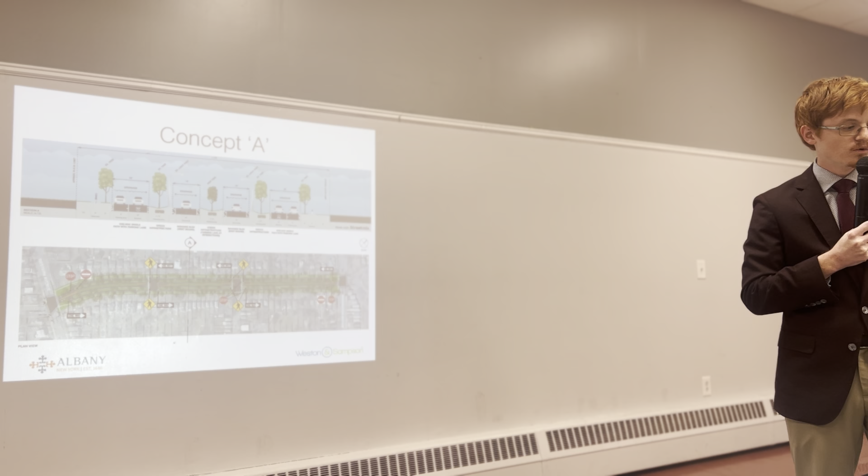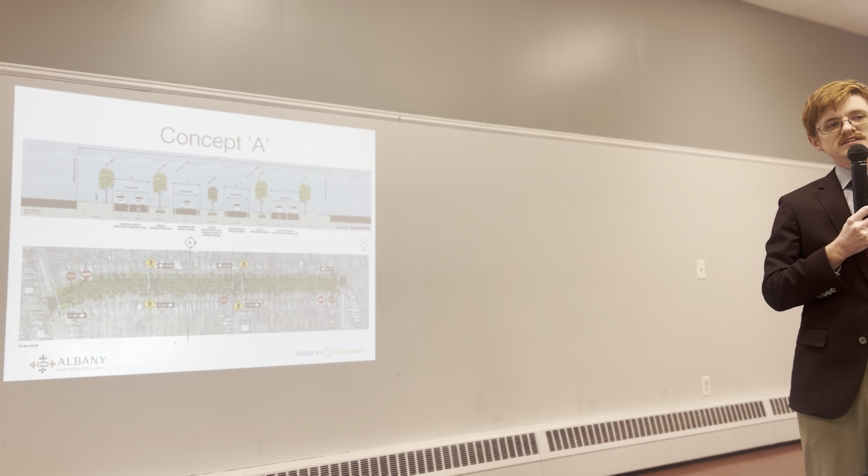Quick overview of those two concepts that were shown. This was Concept A—it had the bridle paths going single direction with a dedicated parking lane. Perhaps the biggest change to the main Manning Boulevard corridor was the introduction of a middle median dividing the two travel lanes, which would take the place of the turning lane at some sections. Reiterating from last time, some folks thought we were removing the turning lane entirely—we are providing the turning lane at all intersections and bridle path access points. It's just in sections where there isn't a true need for one that we were thinking of introducing something like a buffer.

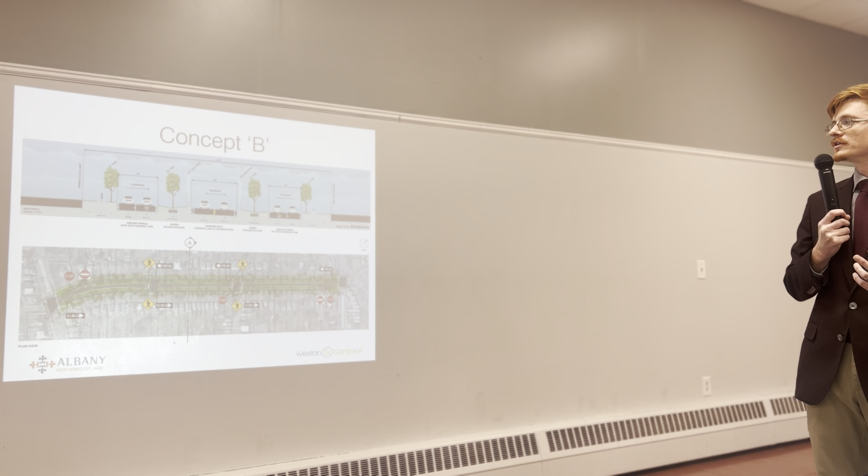Concept B, the second one, had a very similar treatment on the bridle paths. Again, rather than a median, it involved narrowing the road down to two lanes, and then expanding that to include the turning lane at the various intersections and access points along the corridor.

Quick overview of some of the comments we received—these are very high level, we tried to summarize everything into the broad themes that came out of it. There were three main topics: the bridle paths, safety, and the main Manning Boulevard area itself.

First comment: folks weren't super thrilled about seeing the bridle paths go one direction—that was maybe one of the biggest comments we received both at the meeting and in the public survey. Associated with that were concerns about how winter maintenance would work. There were also comments about curbing being desired along that corridor, as well as concerns since both concepts show removing a couple of the access points to the bridle paths.

Folks were a little concerned that might cause additional traffic convenience issues, especially coupled with going to a one-way travel lane in each direction. As far as bike and pedestrian safety, a lot of folks expressed desire for crosswalk improvements, intersection improvements, and additional traffic control things such as bump outs at the intersections, speed humps, those types of things.

And again, just kind of general support for bike lanes, bike infrastructure, and those associated improvements.

As far as Manning Boulevard itself, with the turning lanes, some folks are concerned how this might impact the queuing lanes. That's a big concern now at all the intersections, traffic backing up trying to get out of the neighborhood. There's some general questions about utilities, and questions about narrowing the lane - does that really help calm traffic or does it exacerbate the issue?

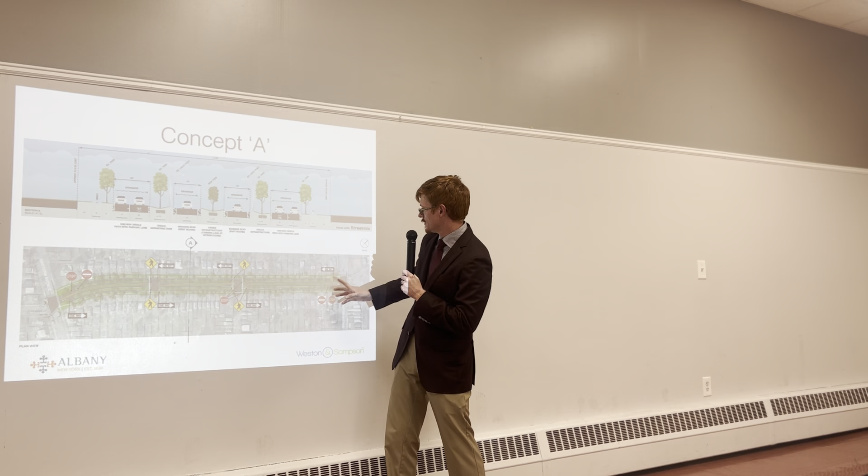Let me pull up the plan concept quick. So again, this was the initial concept, concept A here. I know it's tough to see, but the intent is that it's green space except at the intersections, the main intersections, and at the bridle path access points as well. So again, it's hard to see here, but there'd be a green median in between the lanes, it would be there except at all the bridle path access points and the intersections. It would stop there to make room for the turning lane.

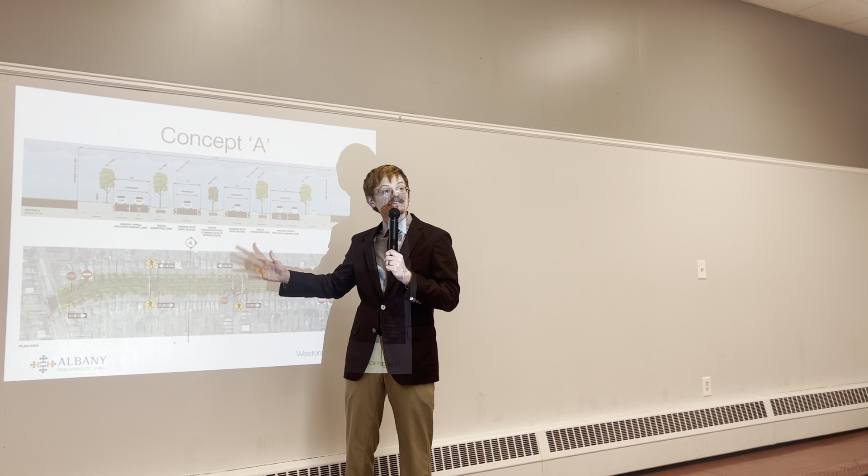Again, the intent is if we needed to add another lane and keep the green space, you're then pushing into the green space, so it's already there, the existing buffers, it's a wide right of way, but a lot of it is actually green space, and so we're trying to minimize the amount that we're impacting that.

As much as we kept the current openings, there would be less green space, kind of disjointed, and that was the thought with removing a couple of them. So if it turns out they all need to stay, there would be less of a green buffer if that's what's ultimately developed with. I like having the amount, I do agree that it's important if you have to be somewhere to not get stuck in a bottleneck, but it's nice to have the green space.

Like we've been seeing with a lot of comments, it's a balance between convenience and aesthetics versus service, or circulation, traffic circulation. So we're just trying to figure out what the right balance to strike is, where again everybody's kind of generally accepting of it.

Has a final decision been made on if there's gonna be any divots or bumps in the bridle path? Because I feel like that could make it hard for bicyclists. Yeah, that's what we're looking into.

Again, it was brought up as a suggestion. I don't recall if it was at the last meeting, maybe during one of the other conversations, or in the comments that came in on the website. We could technically do them there. We haven't looked into that option yet, so that's something we're still exploring.

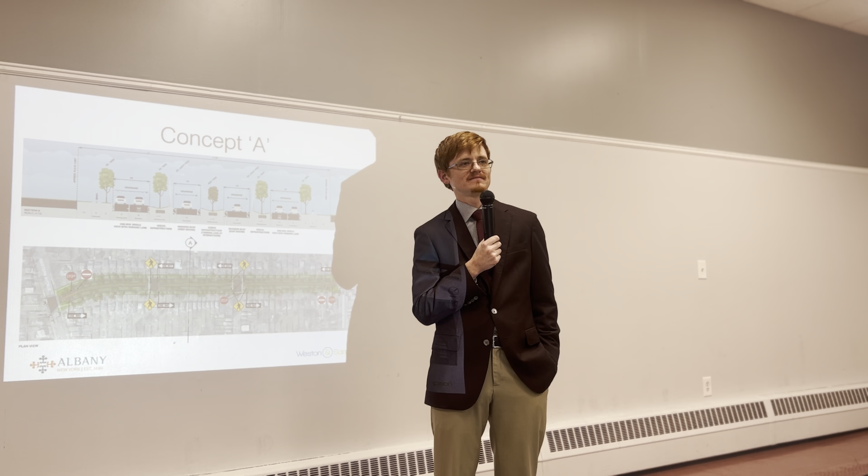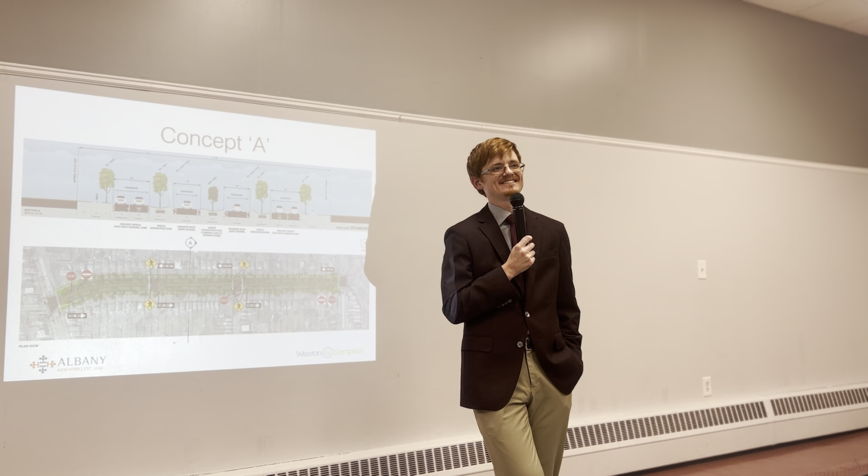And just one last thing, I'm very pro-tree, so I know trees can grow quickly, but I also have a big concern. I think after the initial concept, a lot of people were talking, and we were just picturing like Armageddon on the street, especially late fall, and it's just a muddy mess, and all our trees are gone, and it's kind of depressing. So I feel better that you're saying a handful of trees, but I would love it.

It certainly isn't a clear cut. And as Frank mentioned, the final determination, which I'll reiterate again, is independent of this project. That's kind of a broader thing. Would it happen regardless of this process happening? Yes.

I don't know that there's gonna be an arborist or a meeting with them for people who are super pro-tree. So what we have to do is, again, the report's gonna come out, the report's gonna explain what's coming out and why. The report's gonna say where we're going to put trees and what kind, because it's a matter of if you put the same tree and Emerald ash borer comes back again, we'll lose all the trees and we're all gonna die. Well, the street has a variety, right, that's what I want.

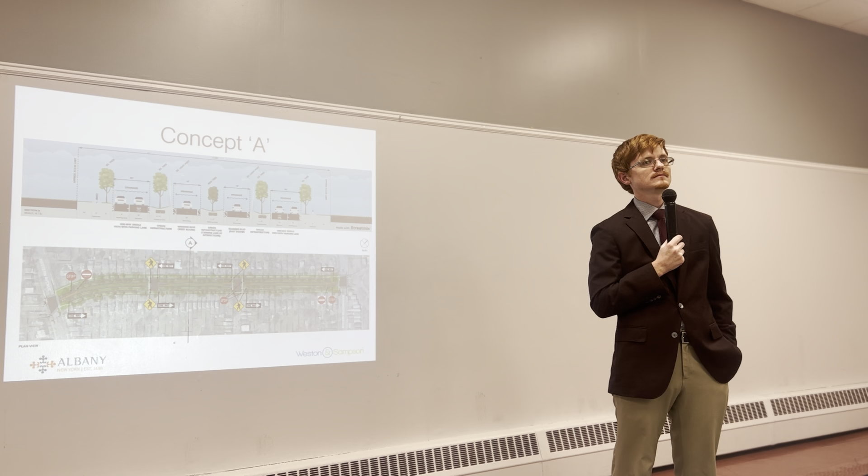That's what we're going to do, save as much as possible, and have a variety. I promise you, that is what he is doing, and that's why a lot of them are coming down.

So there will be a variety, but once that report is out there, we want to hear your feedback. You can always send an email and get back to you with an answer. If you have a question that's not answered, read the report, because 90% of your questions will be answered there. And if there's an additional 10% you don't get, then absolutely ask the question.

And I'm at 90 Manning, just for the record. Okay, alright, who's next?

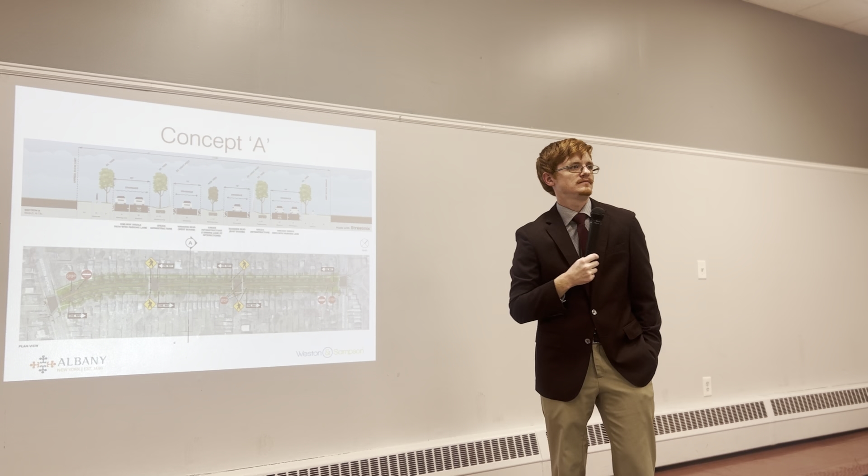Can we appeal a decision to take down a tree? Well, I don't know. If it falls on somebody's house, are you going to take care of them, buy them a new house? Jenny will tell you on Terrace Avenue, four houses got hit by trees within two weeks. We had to take down 27 trees, all because they were diseased. It's happened on a lot of streets, not just Terrace.

Who's next that hasn't spoken? You haven't. Okay. Hi, actually 97 North Pine, so nice to see all my neighbors here.

I just wanted to say it's great to see that cycling is incorporated. The bridle paths are already a great connection that a lot of cyclists utilize. Where we as a group would like to see something happen is better connection to the bridle path. You're kind of just dumped at either end on two busy streets, but I understand that might be outside the scope, but definitely something for consideration.

As a resident of 97 North Pine, the bioswales are a great idea. Anytime we have excessive rain, we're a little bit lower and get about knee-high water, especially if nobody goes and cleans out the drains ahead of time, which is something I myself do pretty regularly. So definitely pro bioswales. It would really help the entire neighborhood, not just Manning itself.

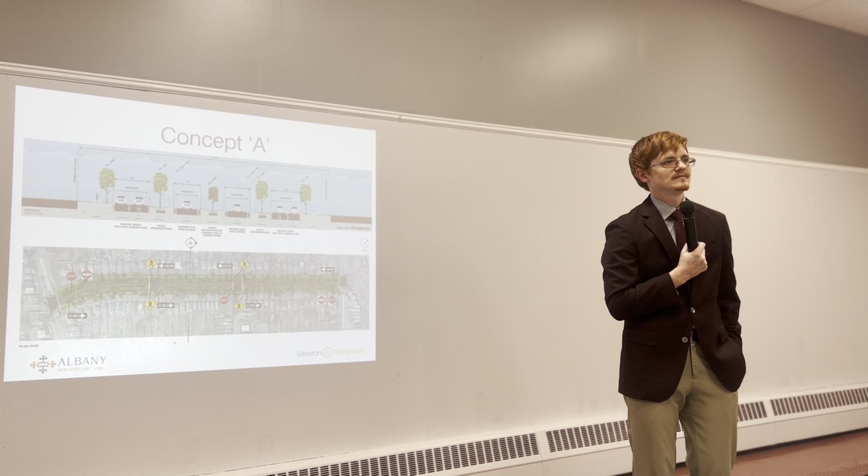Hi, I live in downtown Albany, but I still consider us all neighbors. So nice to see you here.

Manning is a pretty important connector for a lot of people who commute by bike, and one of the worst places is the right turn from Western onto Manning. There's a lot of area there that could be a much more efficient, wider turn, and it would be amazing if that was incorporated into the design. Similarly, coming from Washington the other way, the turn onto it would be a very nice connector for cyclists, because the rest of Western gets pretty bad versus being on Madison after that. So it'd be a very nice connector to have more cycling room.

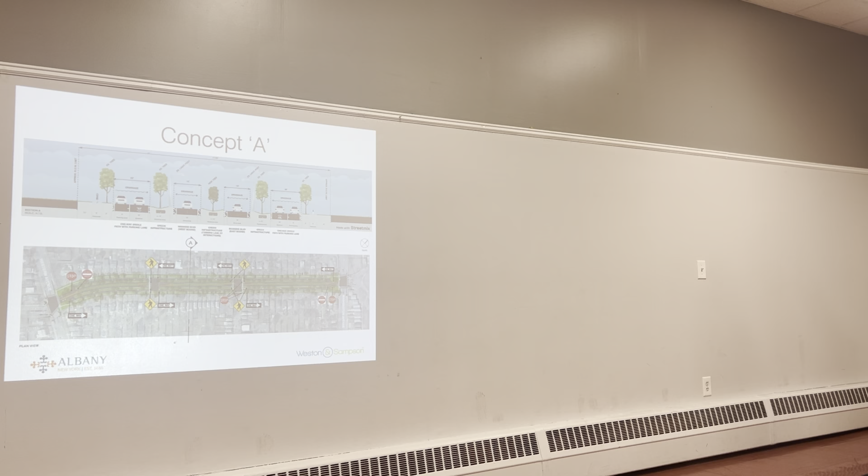My name is Matthew Bush, I live at 158 Winthrop. I like Concept A more than Concept B. I think less space for cars and more space for everyone else is how we should be moving in the city.

The benefit of Concept A is that with the lanes together, aggressive cars will frequently take umbrage at you going the speed limit and decide to fly out and pass you. Concept A prevents that and makes a safer street. I want to second the comment about bicycle lane entrances from the street - those are really important and I feel like they've been overlooked. A third comment: the city has done a great experiment with painting lines and calling them bike lanes, but it doesn't work. I can't tell you how many times on our Thursday night ride we go down a bike lane and there are cars parked in it - always, 3-4 cars just in a few blocks down Madison, for instance. So the bikes need to be separated, and separate from pedestrians too, because that isn't great for pedestrians - kind of like the bike path downtown.

I didn't mean to step away. I just wanted to confirm we are doing some general intersection improvements at Western and Washington as part of this. There's currently a plan to get additional funding for more substantial improvements along both those roads. So you might see some minor improvements in this project, but keep in mind it's always an ongoing thing, and it is being looked at as a more comprehensive improvement project within the city.

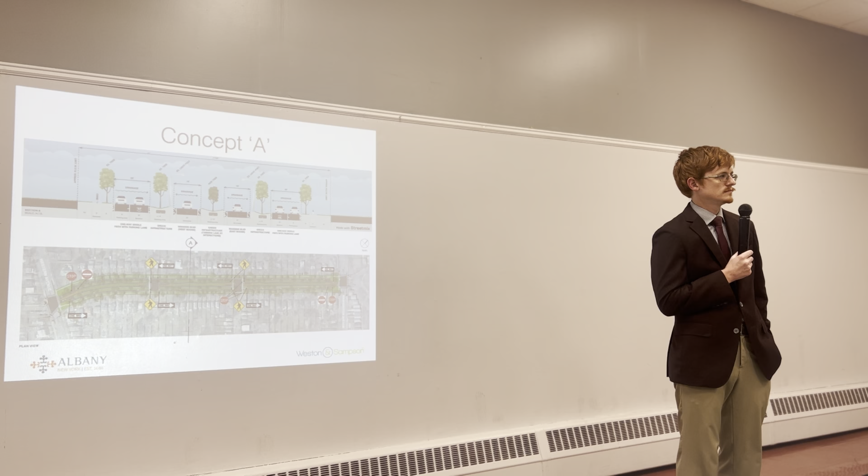You can use those outside spaces either for, a lot of places use them for bike lanes, like a dedicated bike lane in the center area rather than the bridle lanes. Although the intersections get tricky with that too, if it's in the middle. Or you could use it for more green space and more permeable spaces.

As far as the lane, once again, we're showing 12. Keep in mind, as I mentioned, Manning Boulevard has a certain road classification, so we will review with the city and confirm what the acceptable width is for those lanes. But the intent is to narrow them as much as we can.

I just wanted to emphasize, with the city not being able to lower the speed limit on the bridle paths, the need to really make physical changes to prevent speeding there. And I was wondering, is there anywhere that emergency routes designated throughout the city are listed publicly online, or is that information we could find?

Traffic engineering seems to have that information. I'd have to ask them directly. So, some of the routes are just old routes.

Anybody else? Did you have a question? I had a question, just a clarification. You had your question already.

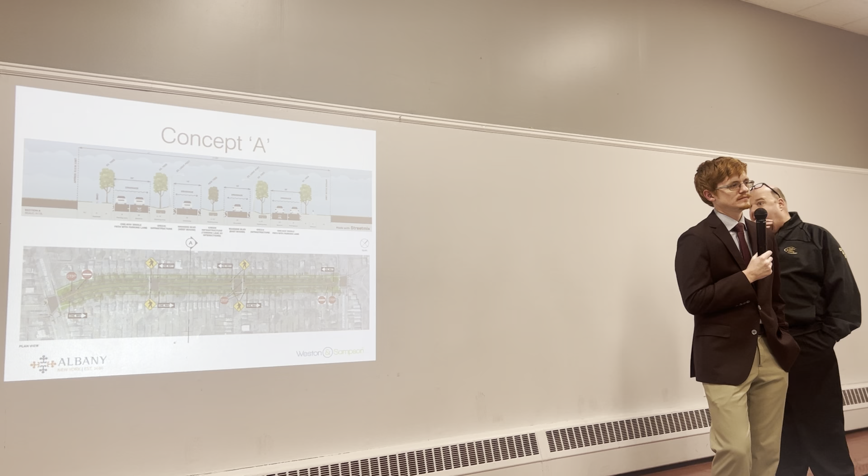Just a clarification, so the center median, if we were to have something like that, like what's shown up— I was more in favor of the 2B, but if you were to have some type of median there, what are you proposing be planted? Are they trees, or are they low-lying types of vegetation?

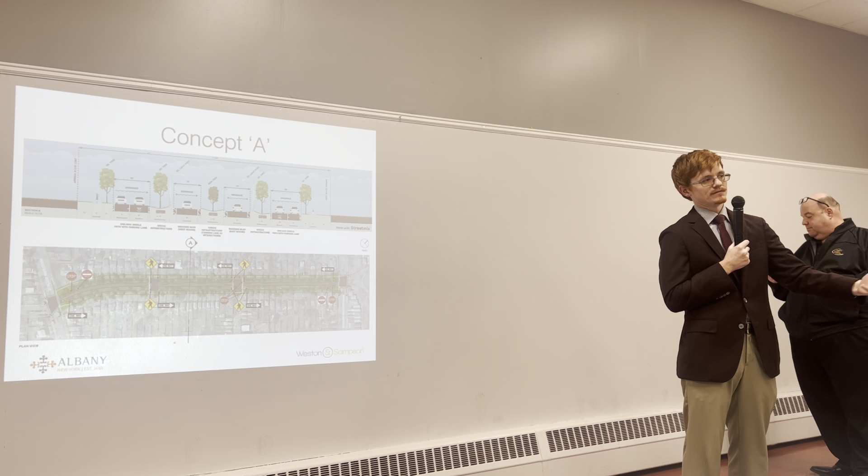That's something we'd be looking at in conjunction with the city, reviewing sight lines and all of that. The intent is that it would serve as a green infrastructure feature, so it could be swaled. The plus side of doing the median versus the other options, regardless of mature trees, is that since this is brand new, we can get it to work a lot cleaner, a lot more of a direct route for that stormwater, even if we do end up doing some trees.

Bioretention areas are usually a mix of trees and lower shrubs, so I can't speak to the specifics right now, but it's something we're looking into. Follow-up question: do you have a concern with one or the other? No, I was just curious.

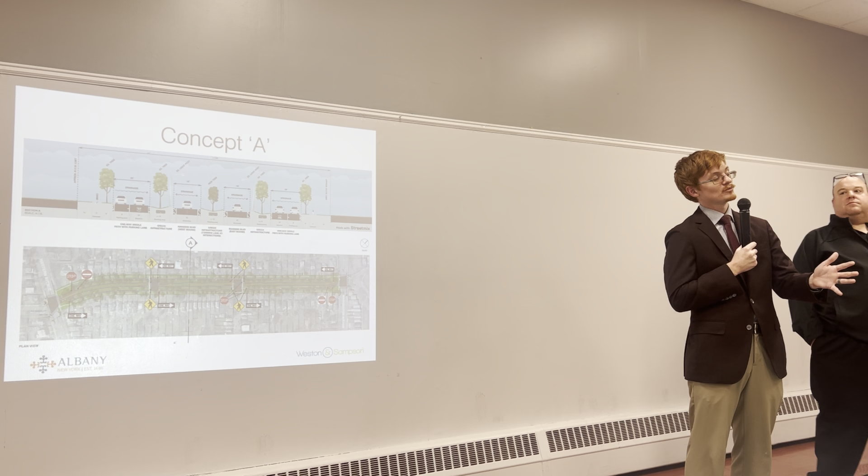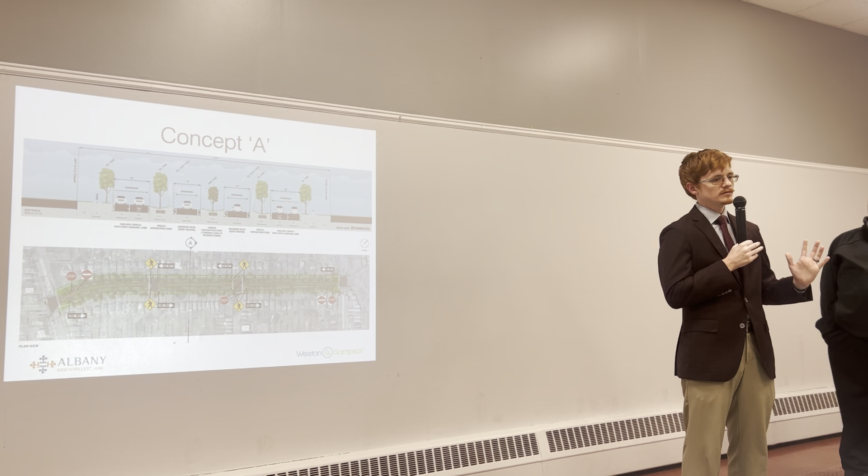And then you're not intending to remove the turning lane, is that correct? Correct, the turning lane—so this green median or the narrowed road with just bidirectional traffic is only where there isn't an intersection or a bridle path access intersection. So the turning lane gets reintroduced at those points, and that queuing length will be worked out in conjunction with the city traffic engineer to make sure it's an adequate length to prevent backing up traffic on the road.

Maybe this—how wide would that green area be, in this one here? That's really blurry, so I'm going to look at my screen. It's about 12 feet, yes, that's proposed now. It's basically taking the place of the turning lane. Right now you have, I think, each lane is about 12, 12, and 12, and you've got some shoulders on either side.

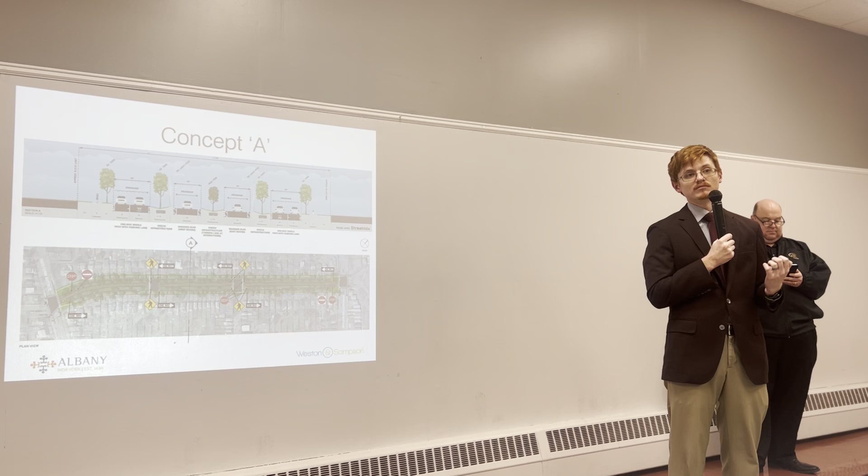So if the lanes end up being able to get narrowed a little bit more, that could get a little wider, but around 12 feet.

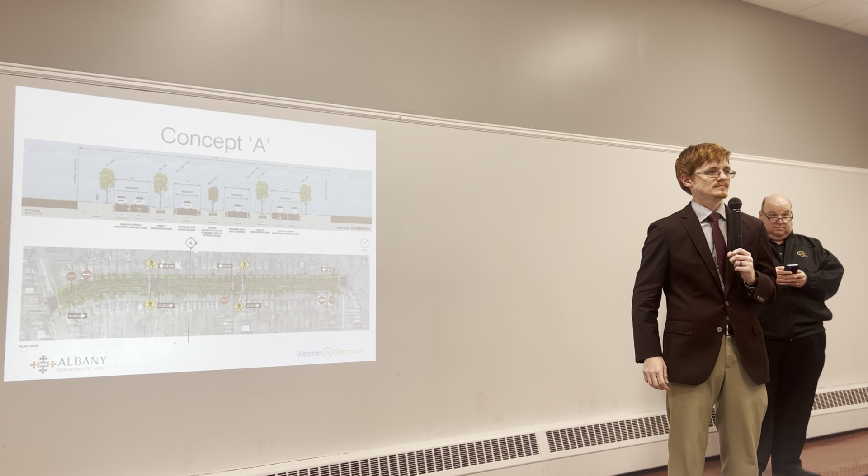So we've talked about safety several times. I'm at 6 Manning Boulevard, so part of my entertainment is watching the accidents happen at the intersection. There's a great YouTube video of those trucks getting decapitated on the bridge. I like those ones, those are good.

I think one of the main things is that extended green light for traffic going west on Western Avenue that people don't notice who are going east on Western Avenue or making a left turn, and they get T-boned. It happens, I'd say in a year, probably a half a dozen times, maybe more. Just removing that sign would probably save an enormous amount of risk, if not damage and harm. So I don't know who that's directed to, but it should go to somebody.

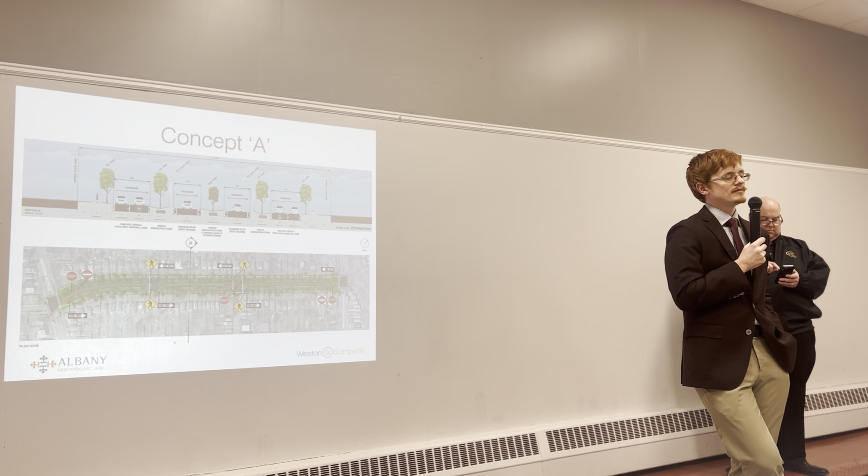That's probably for the city traffic engineer. You'd have to look into it, I don't know the exact reason why it's configured like that currently. You'd have to take a look.

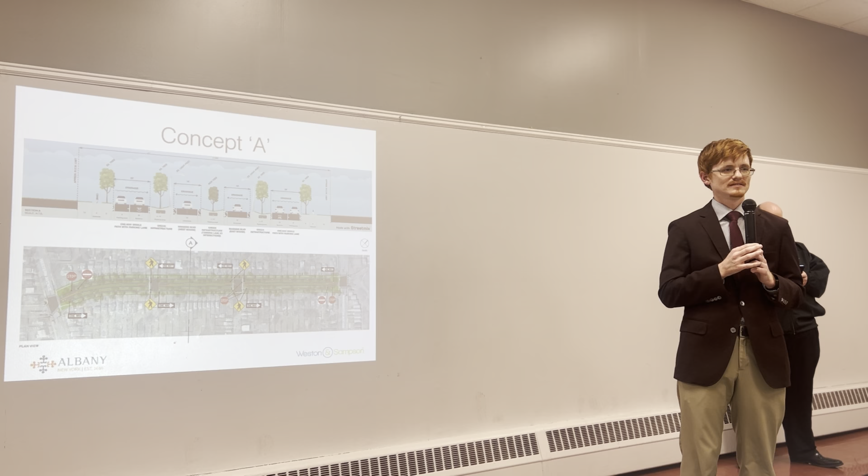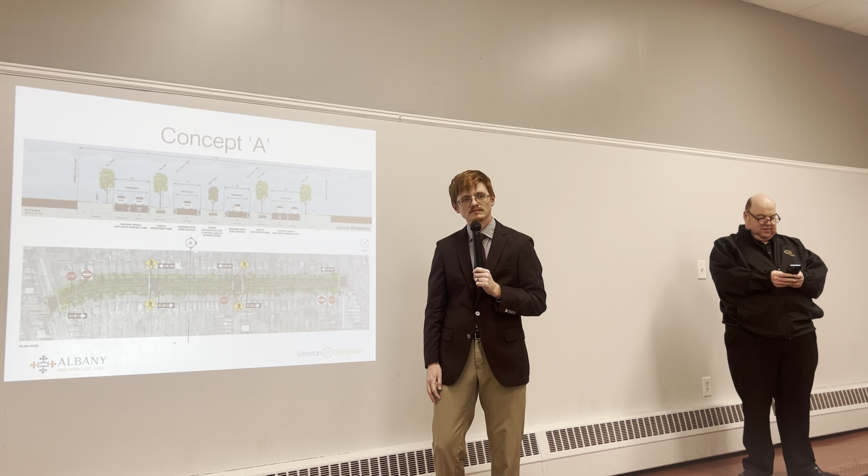Actually, it's just a visual point. Could you just point on the bottom of the concept there, I'm having trouble seeing, we weren't at the other meeting, we live on North Pine, but I can't see where Manning Boulevard is in that green space. Oh, I'm sorry, so this is Western here, and then the Washington's over there. So this is the intersection onto Manning. Oh, so that's Manning, okay. Yes, this here, and then this is where it splits the bridle paths.

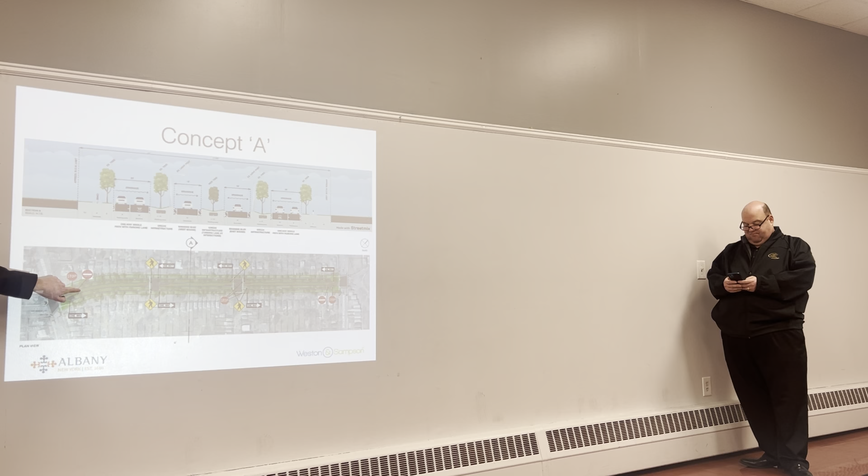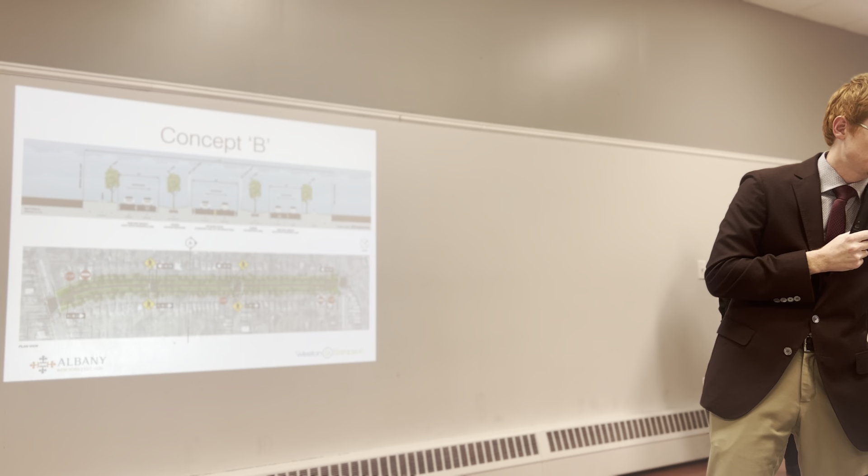And then in this concept, there's a green space in between it. It's probably a bit different than what it is now. So this would be one travel lane, here's the other one. And then, this one here, you can see this one's Manning, here in the middle again, with the bridle paths.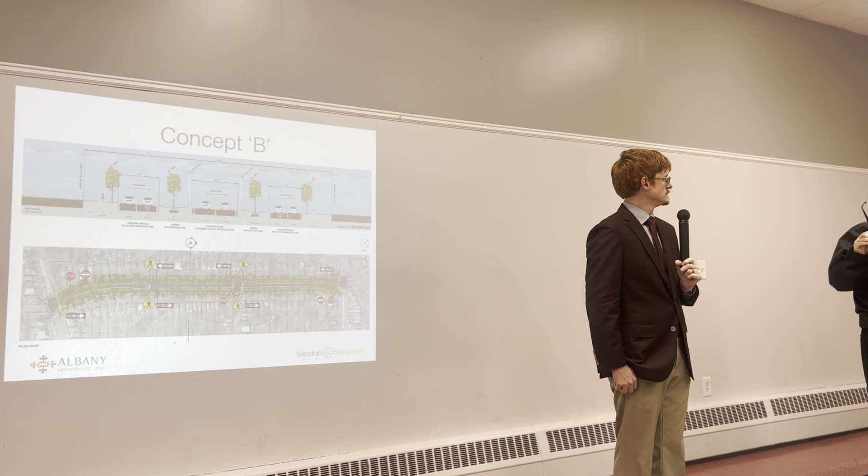I just have one question, and I'm not sure who might be able to answer this, but at the intersection, I noticed it mostly at Western and Manning, where pedestrians have to press the button to get the walk signal. What is the reasoning behind that? Because I've seen so many people who either don't know that they have to press a button, don't know which button to push, and then people just walk without the white pedestrian sign, they just go anyway. And I thought that it would be automatic, and you wouldn't have to press a button to do that. What is the reasoning behind that?

I have to check, traffic engineering would have to answer that. It doesn't actually, so the white pedestrian signal, I will say with that intersection, I walk a lot, it makes no difference in any of the traffic patterns, which I think is personally problematic. I would love if we were able to press that button and nobody could drive anywhere, because a lot of times you get the walk sign and you're crossing the street and somebody can't see you because of the sight lines and you almost get hit.

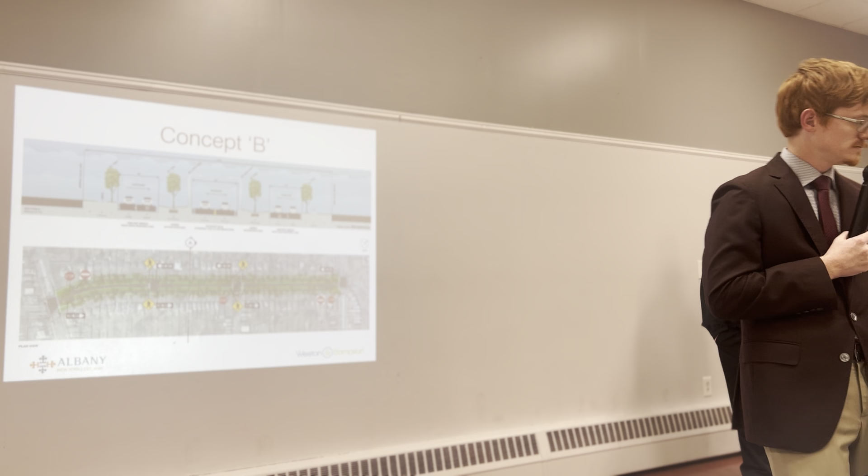So can I ask, I'm Ginny and I'm asking as a resident of 48 Manning Boulevard. So the access points, I do understand, and I love snow removal, so I don't want to make it so it's not possible. But, and this might be a terrible idea, and if it is, I totally respect it, but is it possible to do something where maybe you can just do a right-hand turn-in? So from Washington, you'd be able to make a right-hand turn-in, but then have a turnaround at the end, and then the same thing coming from Western? Because it is like, I will tell you, I never go out.

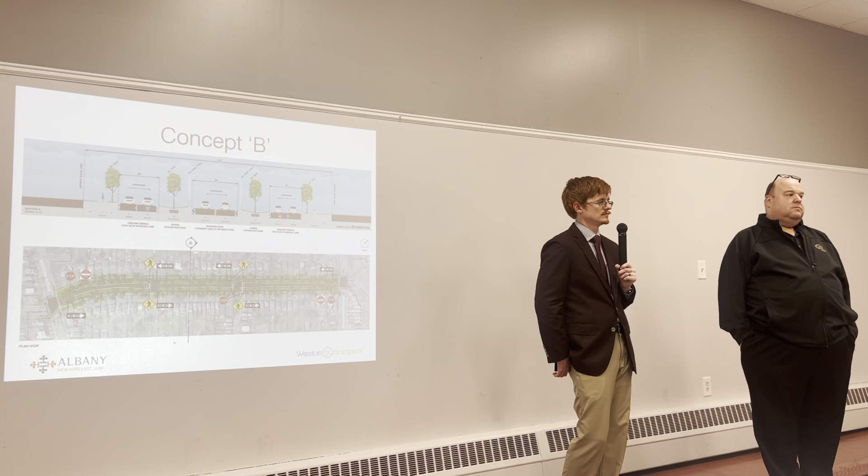It's just dangerous to go out of the bridle path by Western and Washington, unless it's the middle of the night with no traffic, but even then most people just avoid it. They're not really usable entrances and exits, which I think is a lot of the concern about limiting the number of access points. Despite that, I personally love the idea of narrowing it, but I also understand it's just not ideal to do that.

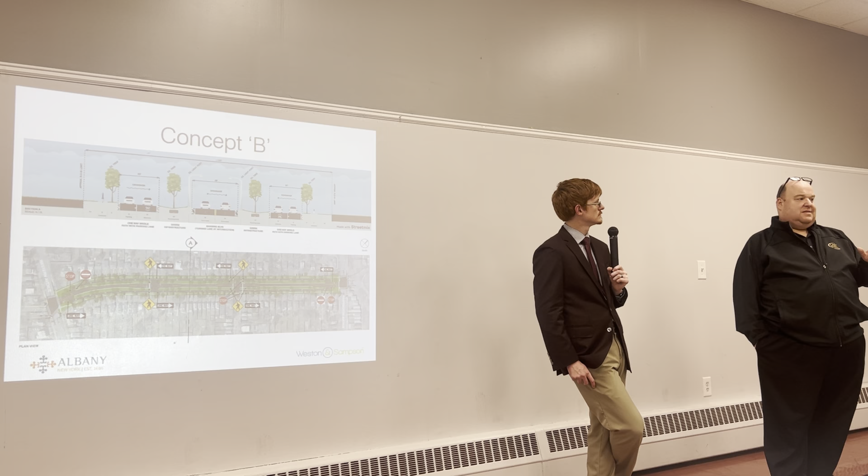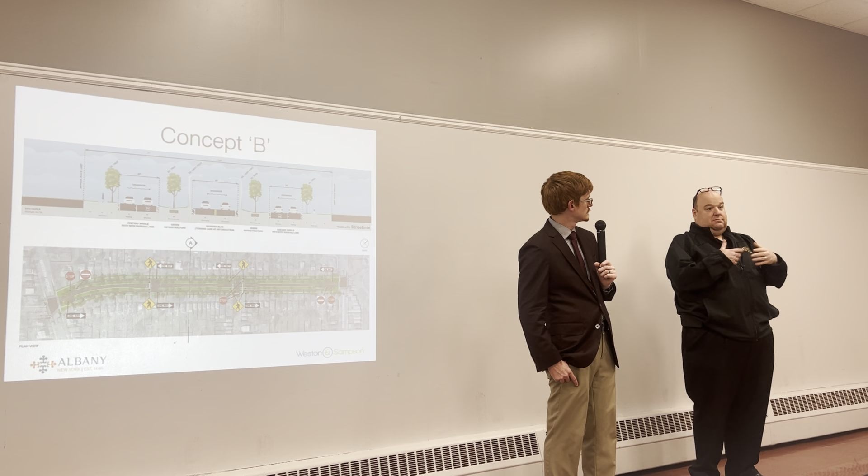So is it possible to do? It's not just snowplows - trees trimmed, recycling picked up, trash picked up - all of those trucks need that space. So almost every truck that's going to come and service all of your houses is that size, so I guess that was my question.

So unless there's a way to do what they were talking about, is there enough room at one end or the other to do it, because the other thing is when people do jump in, it's from the ends too. I would say, I could be wrong, but personally if I could give up any access points, it would be the end ones. Which I also know wouldn't help narrow the road, but I was just curious if it was possible to consider limiting them still. I'm not sure the size of the turnaround, it might be ridiculous, but it's mostly just figuring out if one end.

Based on our first pass, I don't believe we have the real estate to do that, but we can certainly double check and confirm. I figured I'd ask.

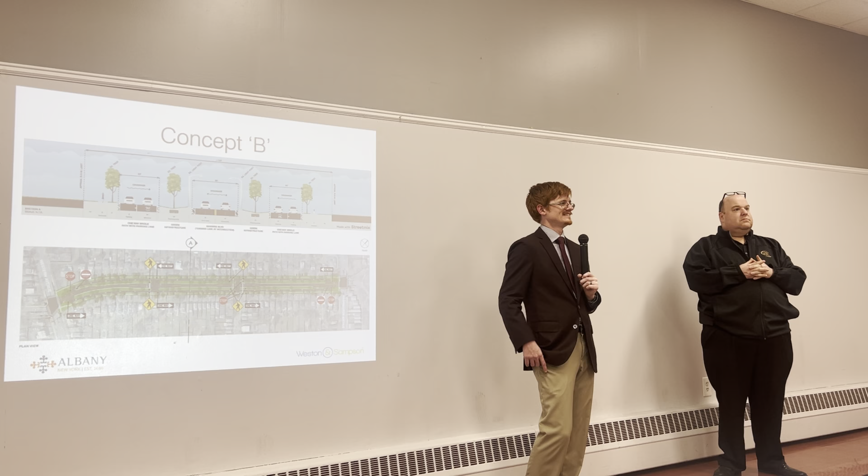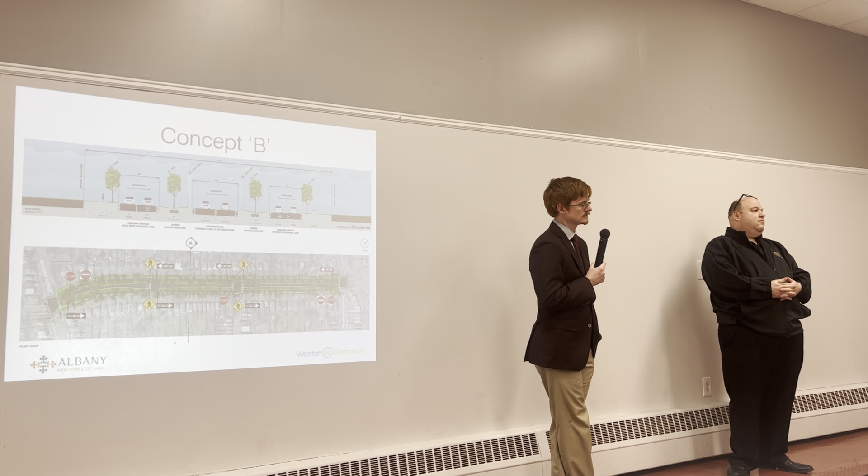Hi, my name is Sophie, I live on 101 Manning, on the corner of Lancaster and Manning. First of all, there's no sign saying it's Lancaster, but there is a pedestrian sign there, and I see so many pedestrians dodging for their life right there. I would really recommend a flashing signal at that point, because the cars don't see the pedestrians, they don't even slow down, and it's a real problem for people walking their dogs, since there's only that one access point between the two.

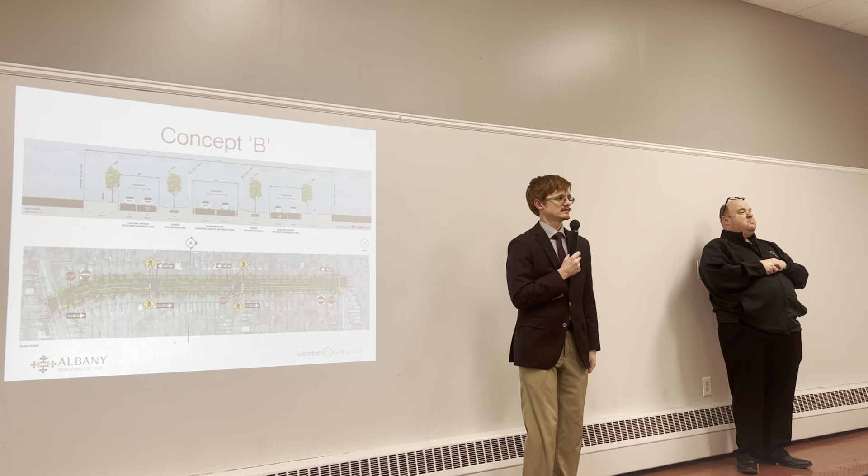So I really would like to see some type of flashing light there for everyone, if that's something we are considering. All right, last questions - this gentleman here, and this lady, and then Thursday night football is on.

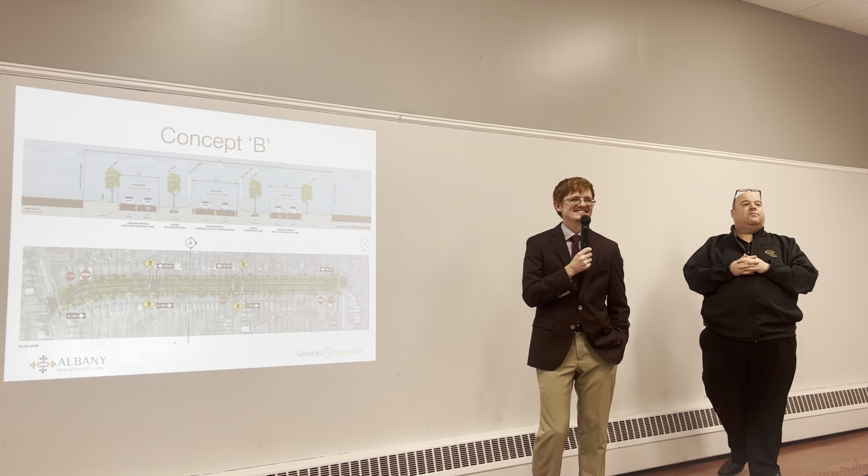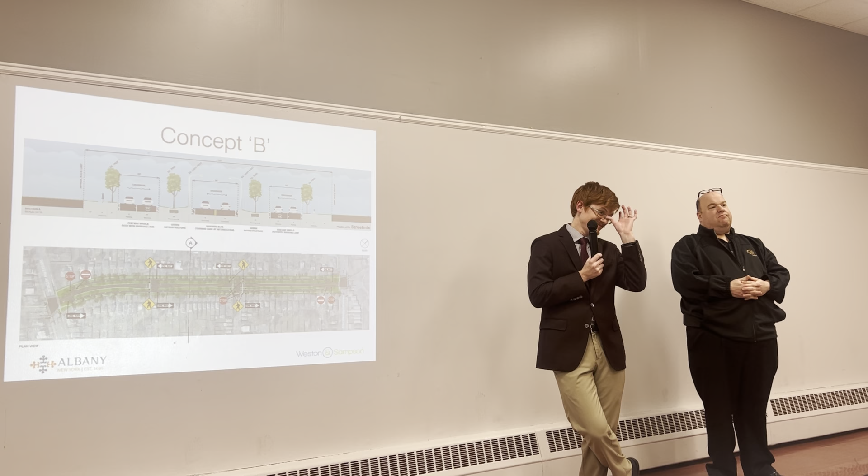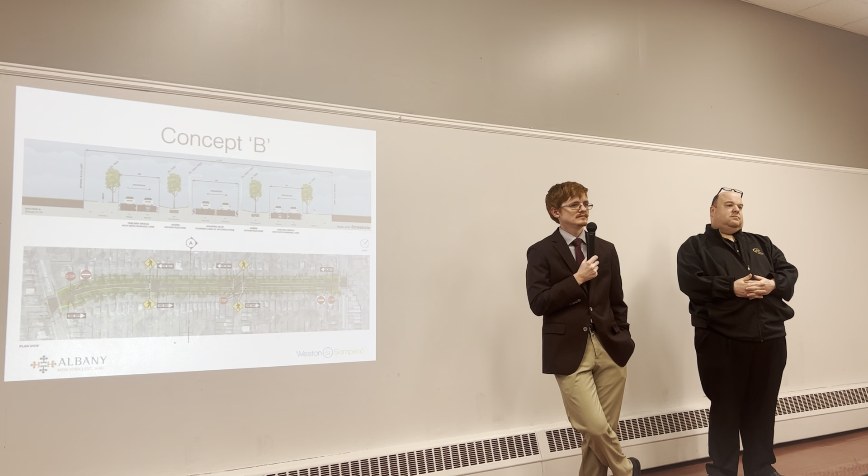Hi, Ben again, 109 Manning. I was just curious - Ginny and I had a couple conversations, and I had a conversation with the previous neighborhood president, who was unfortunately out of town this weekend, but I'd be remiss if I didn't mention she, myself, and a number of other local parents - by local I mean hyper-local - put together a letter. It's a school night, otherwise a lot more parents would be here. It's exhausting. I wasn't sure if Ginny was able to share that with all of you, but I'd love to distribute that memo directly to you as well if you have questions or concerns. Again, not every young parent can be here - they would be if they could, and not only because that means they're not at home.

We did receive the letter. I appreciate it, thank you so much.

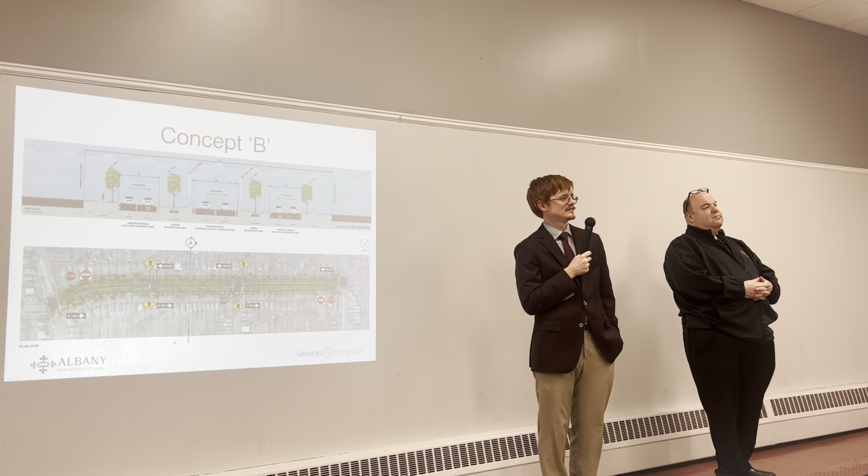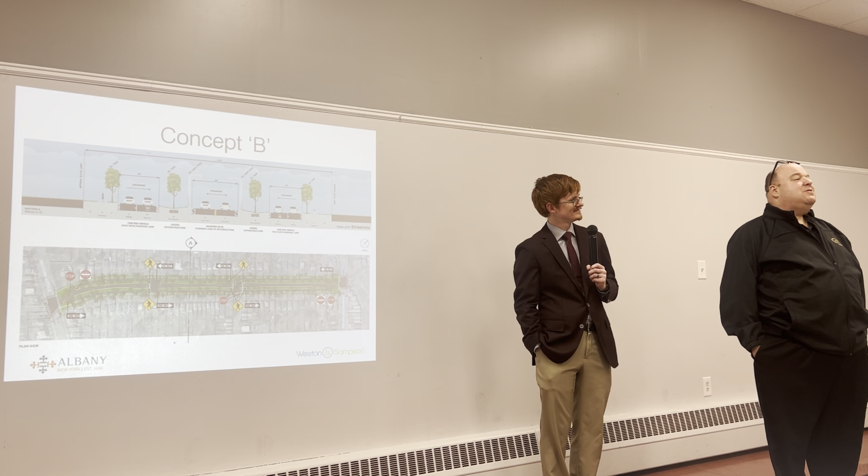15 seconds, like a football. Just responding to what Ginny said, and my previous question, which would be nice to cut off access at the ends of the streets. How about signs that say 'Do not enter'? But you can tell the garbage trucks, the fire trucks, and the police trucks it's okay to enter. Gone is the day of 'do as I say and not as I do' - a lot of us grew up with our parents saying that. Today, oh my God, yeah.

Any more questions? I think this was a great meeting.